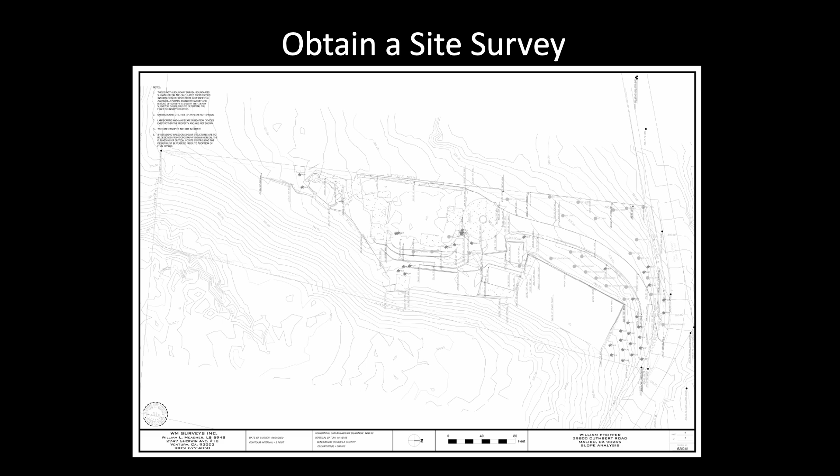Your architect will assist in finding a surveyor if you have not already done this. In this case, the survey was done after the foundation was removed, so there was no record of where the previous house footprint was located.

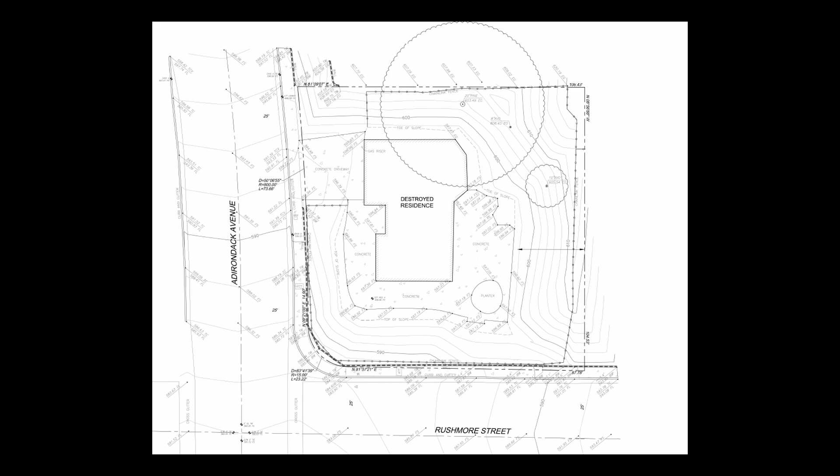This is in contrast to a survey that was done for a rebuild in Ventura after the Thomas fire. This survey was done before the foundation was removed, so there was a clear record of the previous house location. This made it much easier to obtain approval from the planning department for the new house footprint.

The Malibu project did not show the previous footprint, so we had to get creative to document the location. There were no records at the city showing the previous house, not even any permits documenting that the house even existed.

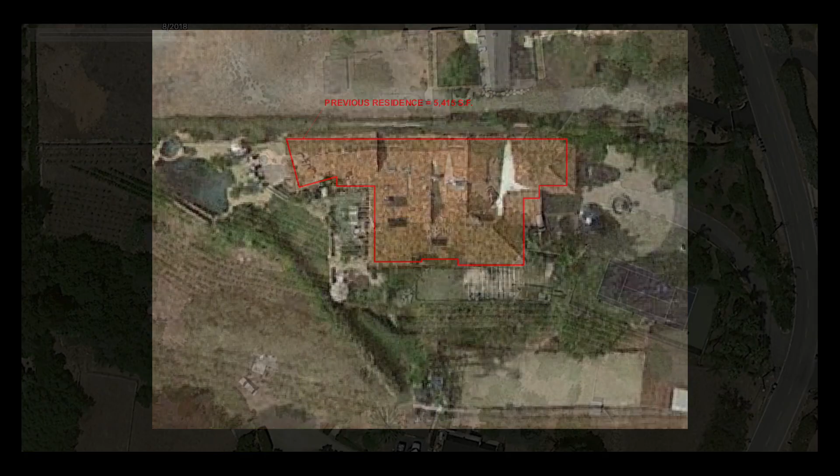We were able to find an old floor plan of the previous house. We used Google Earth to show where the house was destroyed, using its timeline feature to show the previous house. We then superimposed the scale footprint taken from the old floor plan and overlaid it on the photo.

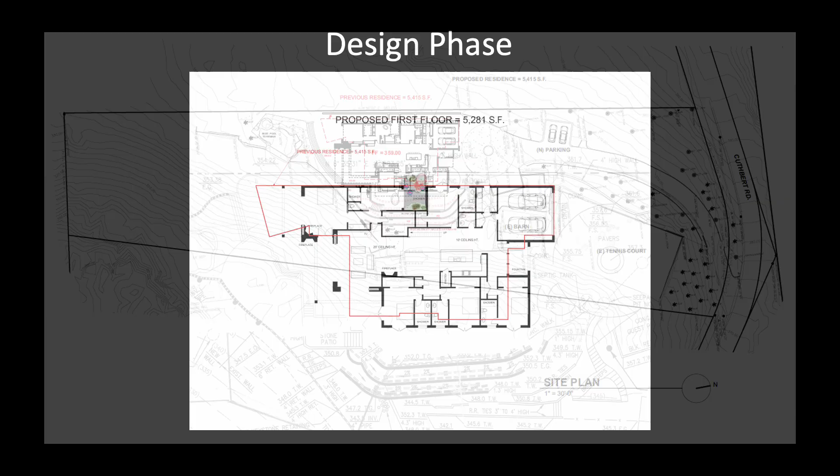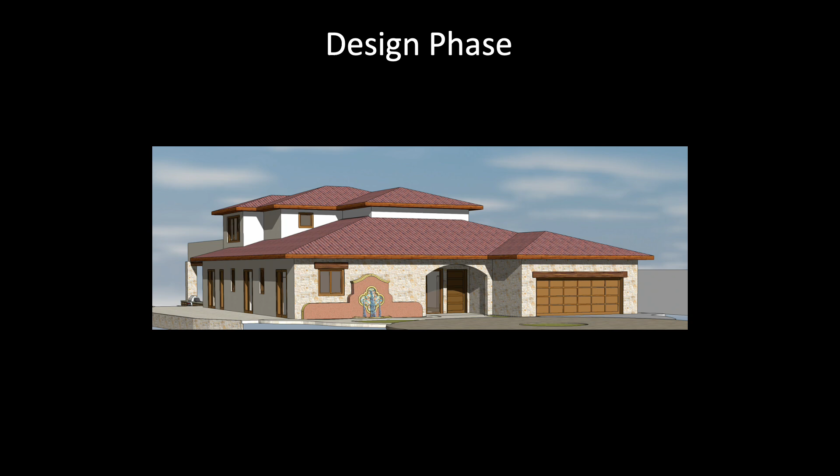The Malibu Planning Department allowed this to determine the location for the new house footprint, allowing us to prepare a new site plan showing the new house to be built in the same location as the previous home. A new floor plan is then developed by the architect during the design phase, and once a plan is developed, 3D models are created.

Different architectural styles can be explored. This house was begun as a Spanish or Mediterranean style, and then evolved into a more modern style of architecture, working closely with the owner's desires as the project progressed.

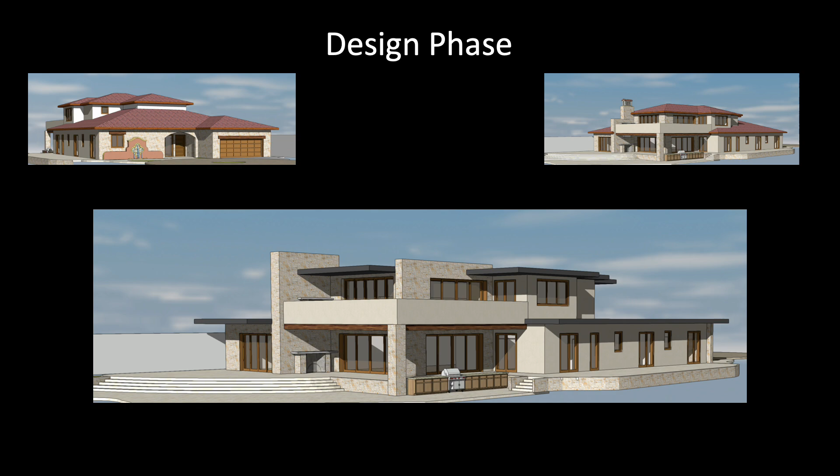We worked with Champion Builders from the beginning of the design phase. They prepared detailed preliminary cost estimates to keep the project on budget, taking into account different levels of interior finish quality. This can help with budget decisions before the project has reached the completion of the design phase.

Champion Builders can also provide preliminary cost estimates for the exterior site work, such as pools and landscaping. Once you are happy with the final design of your new home, the project can move to the next phase.

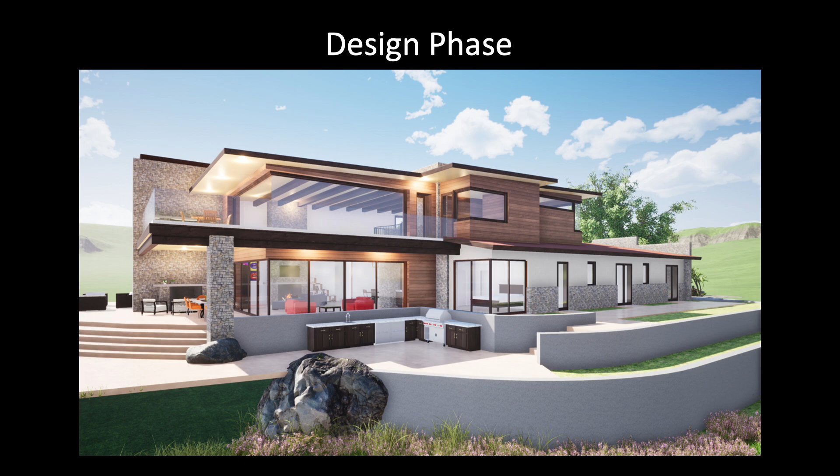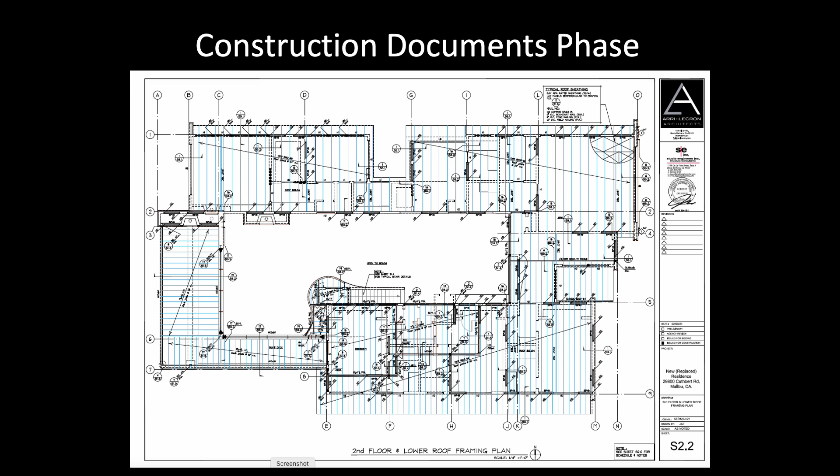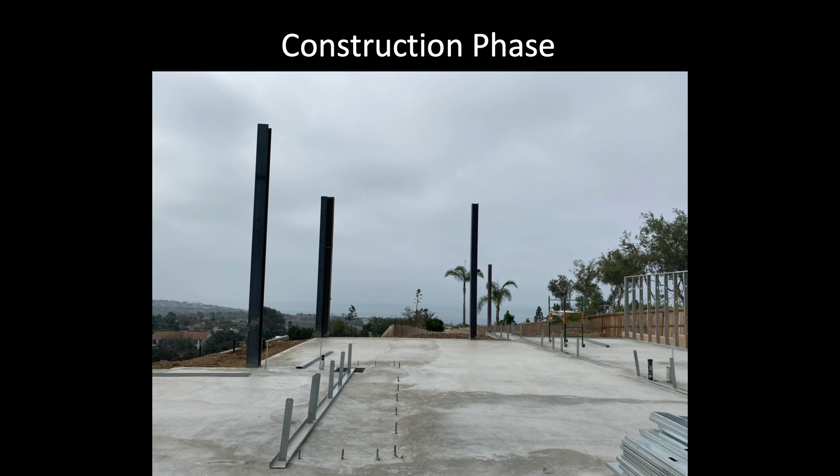Your architect, together with structural and civil engineers, will prepare detailed construction plans. These plans are required for permits and for your builder to use them to construct your new home. These plans will be submitted to the government for plan check to obtain a building permit, and once a building permit is issued, construction can commence.

Construction can take between 12 to 18 months or even longer, depending on the size and complexity of the project. It is always important to incorporate fire-resistant design and construction techniques in any new construction.

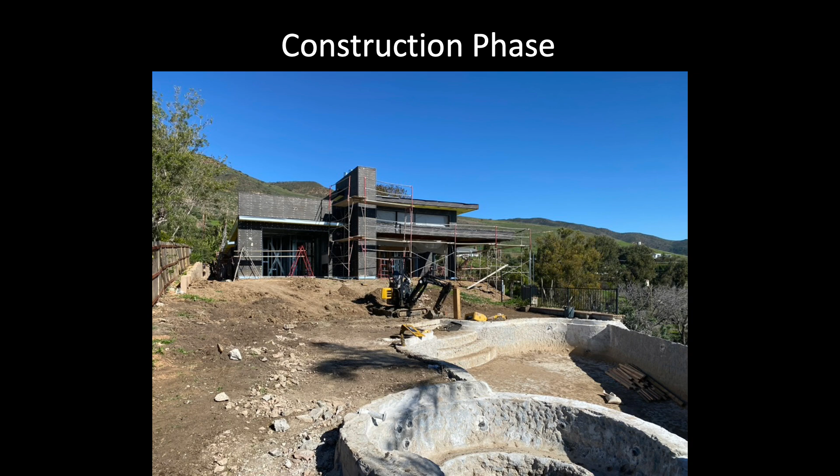Once the home is finished, it will all be worth it. The satisfaction of living in your brand new home will be a great feeling for years to come.